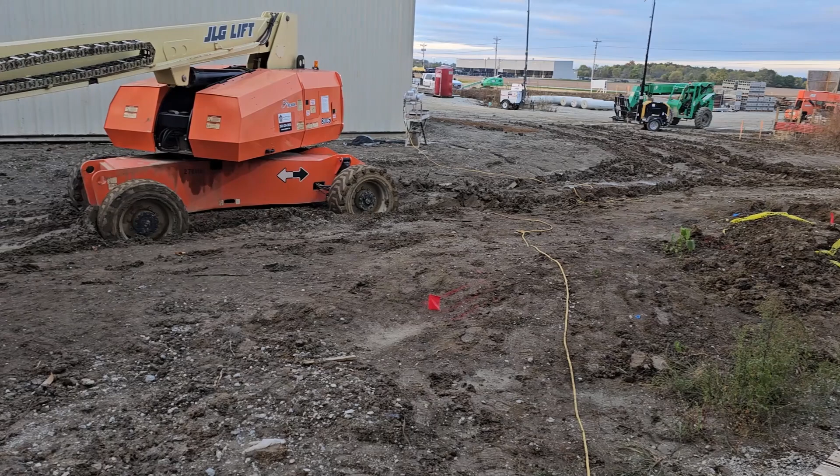Well, at least I'm not the only one having a bad week. That thing's pretty stuck. Hey, it was a sight to behold. We missed the show, or I missed the show on video. I saw it, but they've got enough equipment here. They got a big green loader right over there. Pull that thing right out.

But what a muddy mess. Hope they don't bring that inside the building.

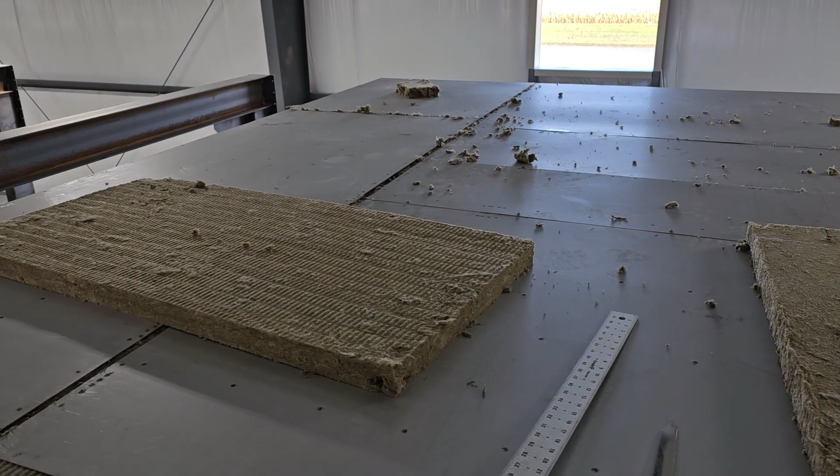It occurred to me I haven't given you guys a top-down view of this thing. This is the lid of that big oven that we put on yesterday. I explained that the top is designed to blow out. Right down the center you'll see a flat strap going down the full length of the oven. It only gets fastened on one side, and underneath there's another flat strap fastened on the opposite side, so it's like a zigzag type joint.

The panels don't get anchored together. They just make a Z groove kind of thing. So this whole thing will explode left and explode right, and the center seam will open up.

Those panels are attached out here to the wall with that little angle you saw inside, but they're literally laying on the beams across here, and they overlap each other with that flat strap down the center. That occurs the full length of the oven, except in the center where we have an exhaust blower we have to cut in, and then a purge blower. There's two blowers on this big oven, two exhausts, because it's such a big oven it needed two.

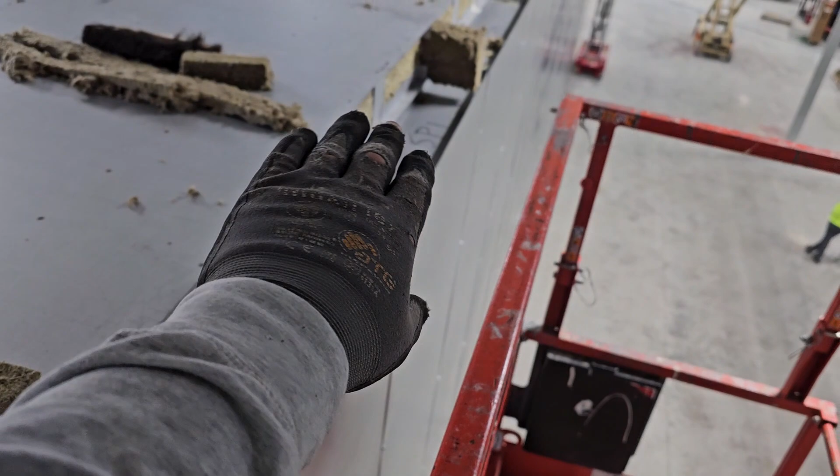We're just insulating up here. This is the 8x8 coping that goes on up there, similar to this other oven - you can see the coping's already on that one.

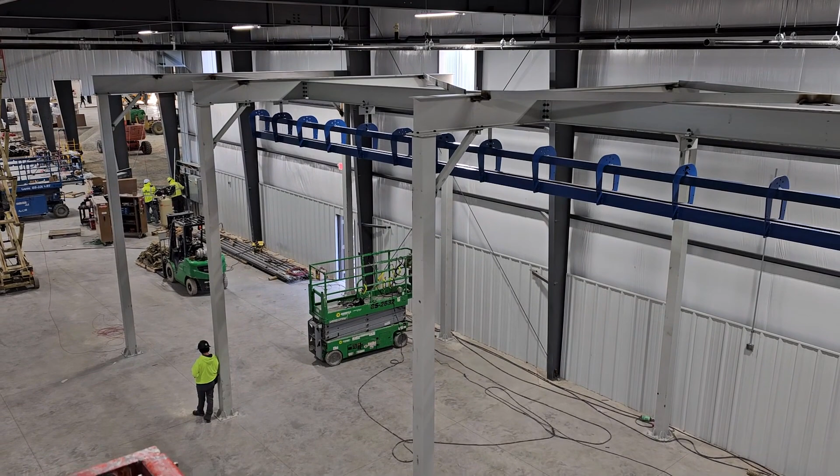Alright, I thought you guys might like to see a top-down view of this whole setup. There's the white conveyor supports - they're working on that right now. Well, not right now, they're on break, but yeah. It was quiet here so I thought I'd shoot a little video.

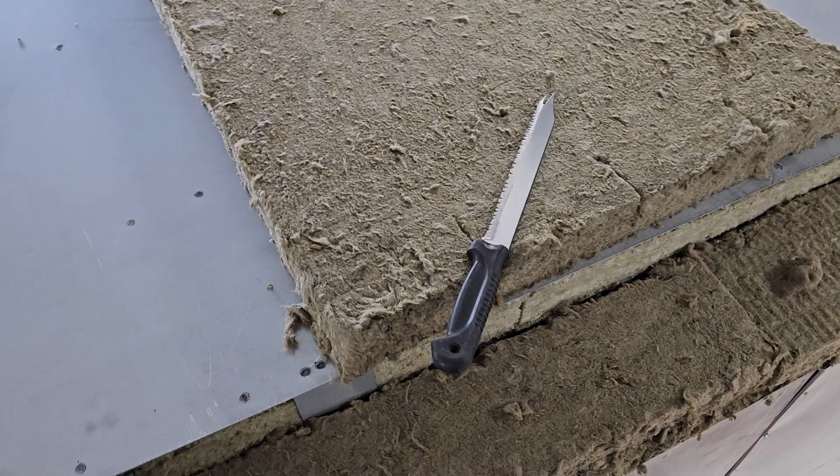Best tool in the world was right here. It's been resharpened about a million times, and I put serrations in it with a cutoff wheel, and keep it sharp because that rock wool really dulls it up. So between that and a straight edge, I just come up here and have a day.

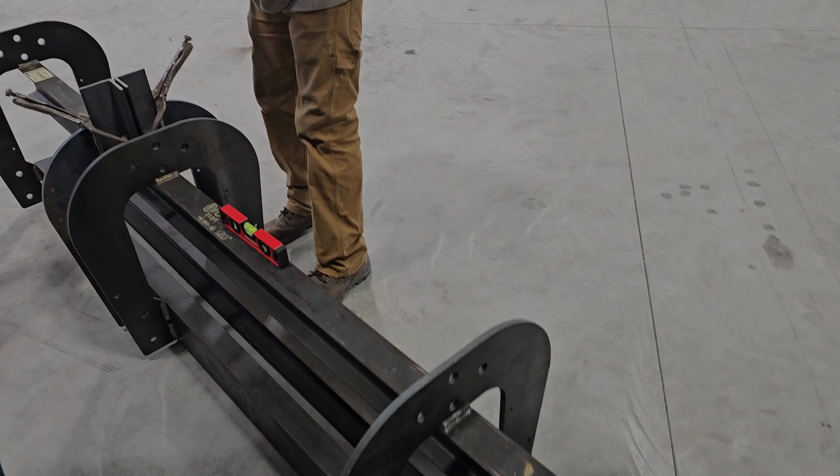Did you? Yeah. Cool. Hey Cameron, can we get another conveyor rail in front of that other door over there? Because you don't have all the doors in the building blocked yet. Yeah, I guess - we need to block them all so nobody can get in.

So we got some material in, nice. We're able to build some structures that go inside the oven. That's going to be kind of a Friday project.

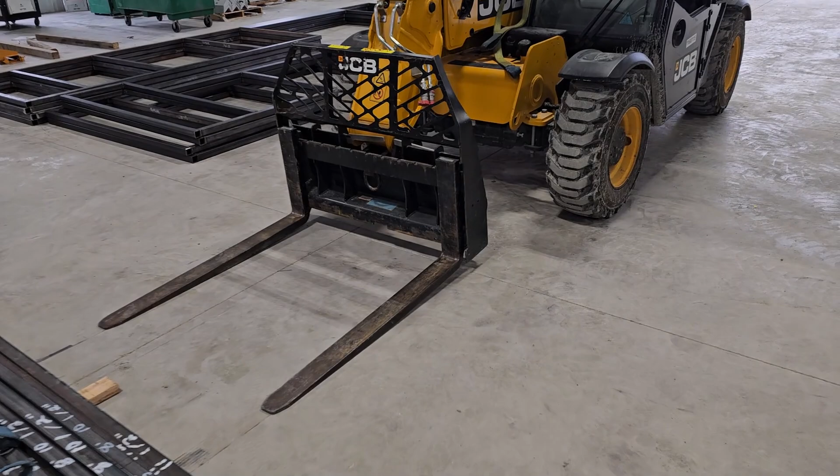And then we got, these are the actual fronts of the oven. They call this a keyhole. This is on left and right halves - that's the bottom down there, and the product comes out of that opening. This is for a drop rod, and these get spaced out a little bit because the conveyor goes through that slot right there.

All those panels there get covered up with sheet metal like you see down there. With all this, you just skin it with sheet metal, that's it, and stand them up. We're not ready for those yet because as soon as we put those on, we cannot drive inside the oven anymore.

So we did get a truck. We've got a little bit of work to do. I'll show you the plans real quick of what has to go up here.

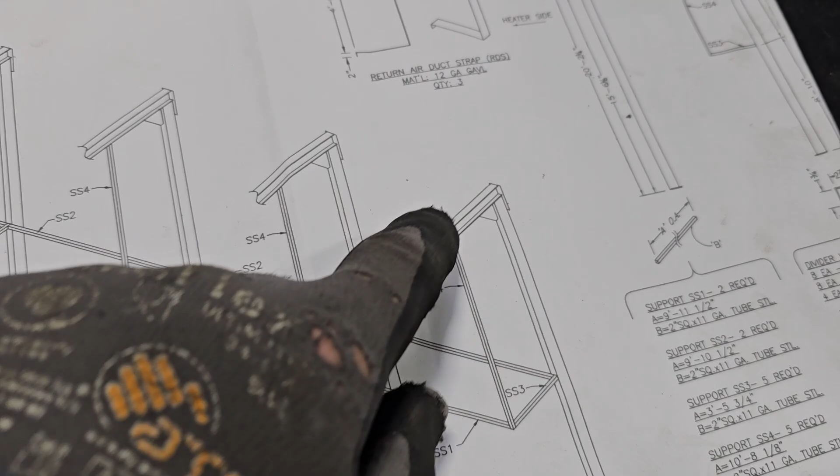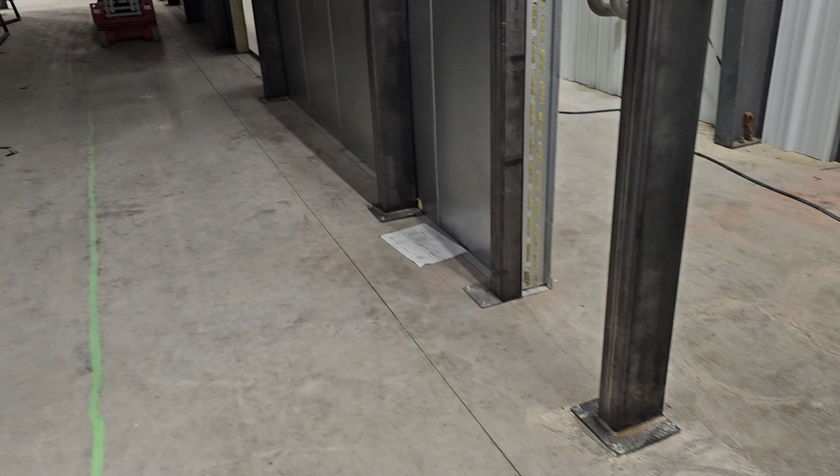These are the existing structures of the oven here, and these are all those 2x2 tubes. So we're building a frame that goes around all this, and then it gets covered with channels and angles, and then, and only then, we skin it with B-deck, as seen there. And then we put an 8x8 capping outside there. So basically those are just inside the oven. Those are just a space wasting cavity that goes in there. It's just air that we don't have to heat, but the steel still acts as a heat exchanger. We're still going to superheat the steel.

All right, so we're building hockey sticks now. Then we're going to hang them in the air and put them in. And then, as you saw in the drawing, there's longitudinals that run in between them. Not too hard to put in, and then the B-deck hangs pretty easy. It just slips into that angle iron. All right, so we've got a little bit to do. We're going to try to get these structures hopefully hung today.

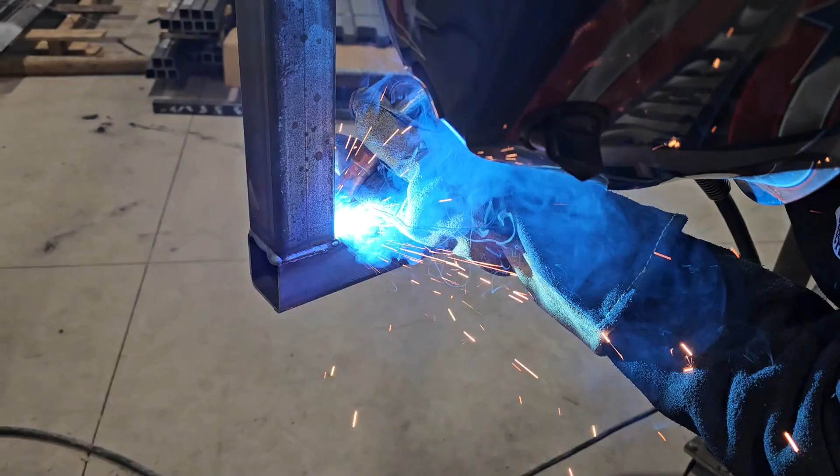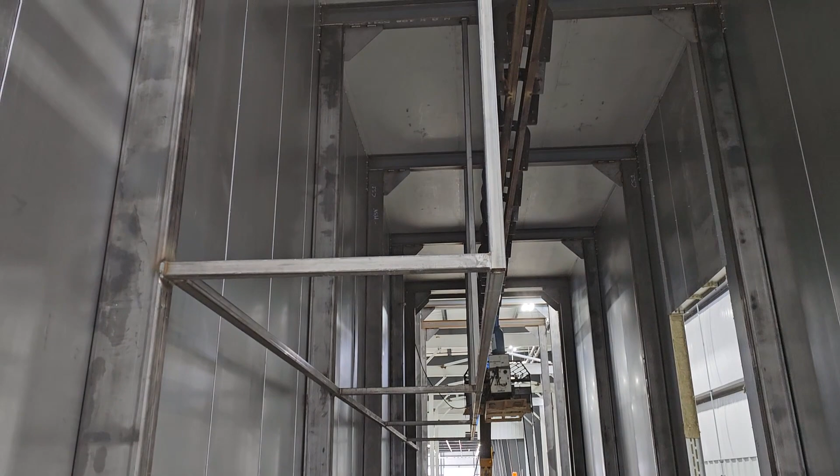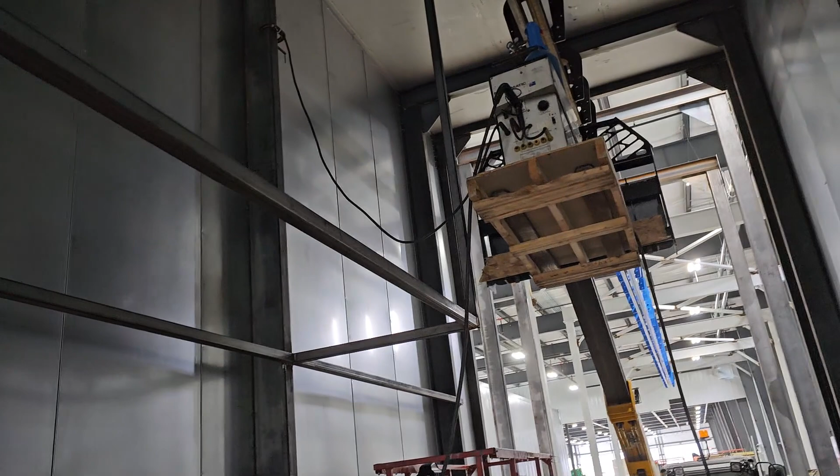Okay, we're coming up on the end of Friday, and this is the space wasting enclosure we have to build inside of the oven. That all gets sheeted with B-deck, and that runs pretty much the full length of the oven inside. So on the face of it, the belly of it, and on the ends of it, it gets a B-deck corrugated. It's heavy, it's about 18 gauge.

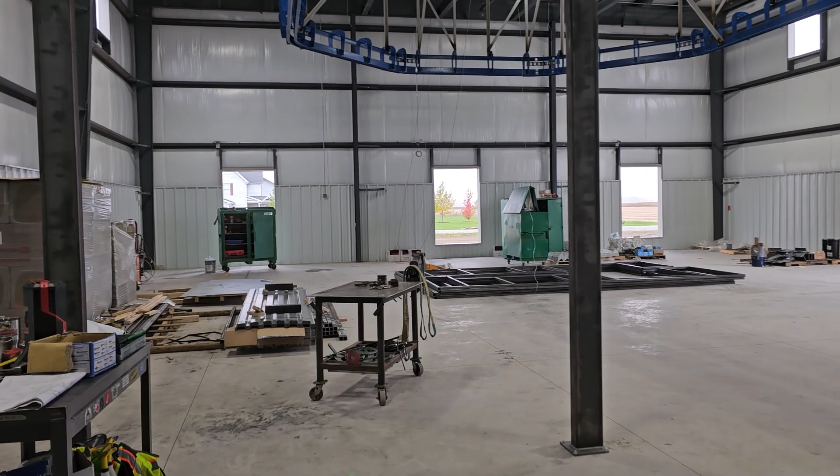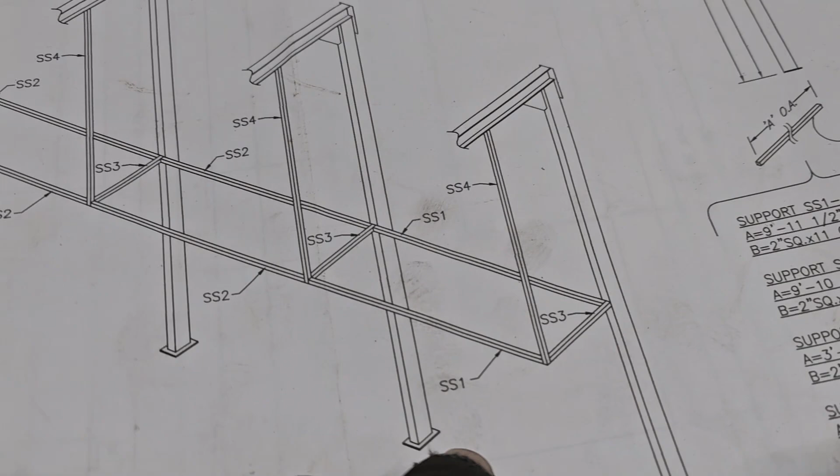But that runs full length, so we got that far just in a few hours. We were waiting around on our truck, and everything comes loose. I'll show you what they ship us and what we have to put together. There's the B-deck, and then they just send a bunch of pre-cut pieces, so those are interesting. You just put those together in the configuration I probably showed you earlier. Here's the configuration. You're just building like a trapeze, and then it gets sheeted with B-decking just like that. Okay, so that's what we're up to today on Friday.

Probably gonna work a little Saturday, but Saturday's work will make it into episode number 5. This is gonna be 4, so this is week 4. My little Miller 211 still isn't back. I called on it today, still waiting on parts, or so the guy tells me.